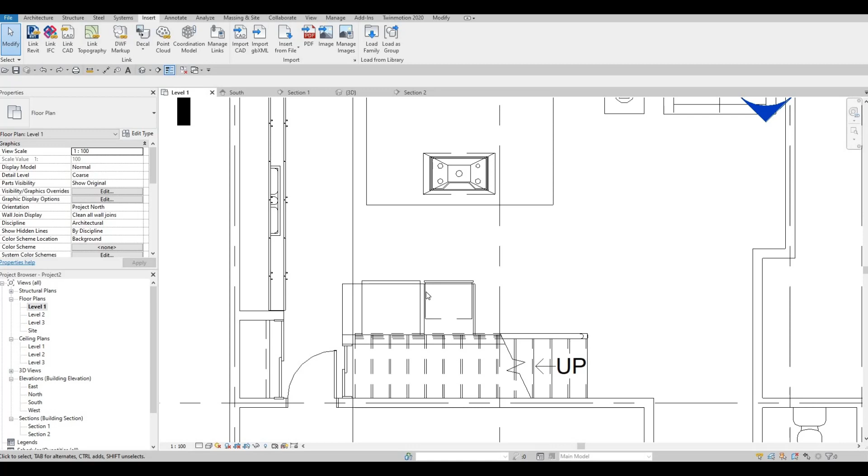So in the previous video, we were able to finish off the kitchen. And as you can see, we have the island and we have the fridge here. And then we added some furniture. And here we're going to continue working on this. And what I want to do is I'm just going to pull this back because I want to add an extrusion later on here. So I'm just going to leave it like that.

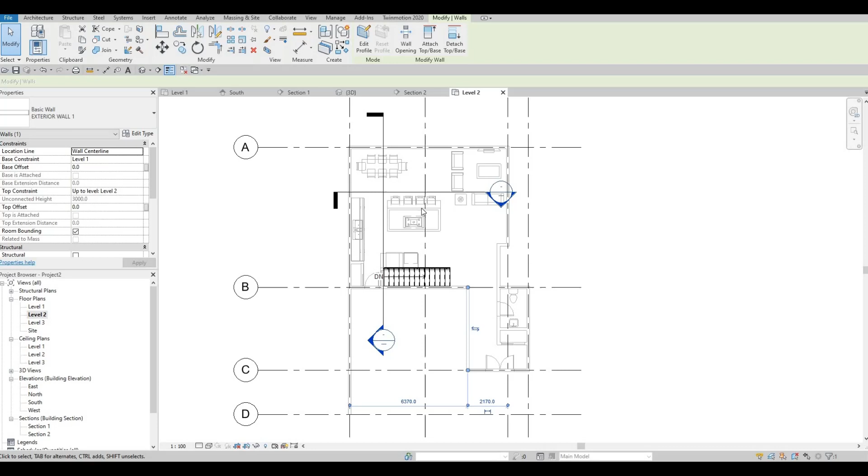But what I want to do now is we should add the second floor. So let's go to second floor. So it will be right here, level 2. And then as you can see, we have an overlay of below. So that's fine because we're gonna create some of the perimeter of the walls with this one.

So let's press escape multiple times and then click on architecture, click on wall, and then we want to make sure that this is exterior wall. And then after that, you want to make sure that it's up to level 3, which it already is, and it's centered, and then it's chained. And then now we're ready to add it.

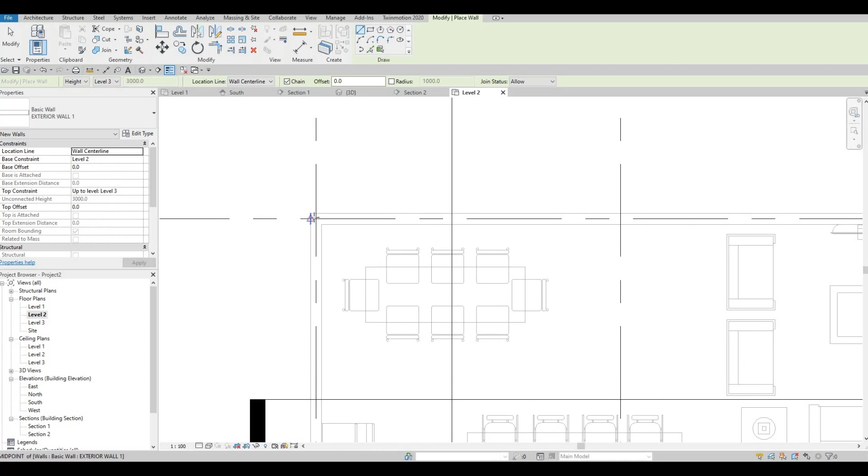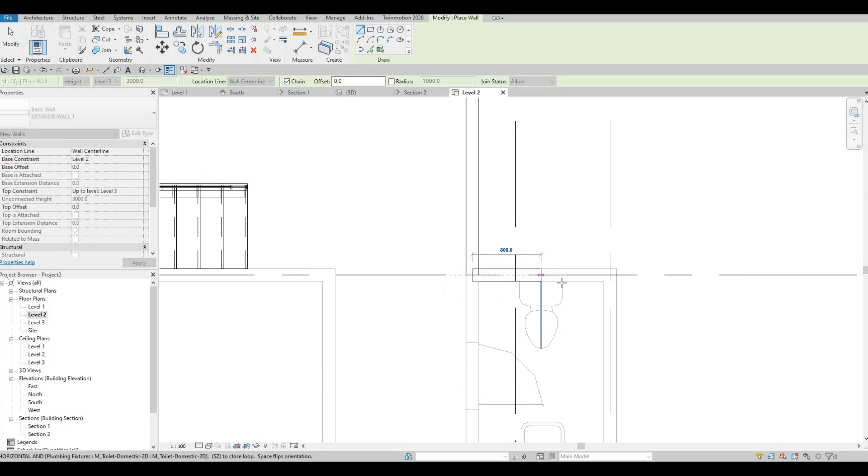So click on A1 up to A3 and then going down and just copying this one at below. So we're copying what we did below. Move it like that.

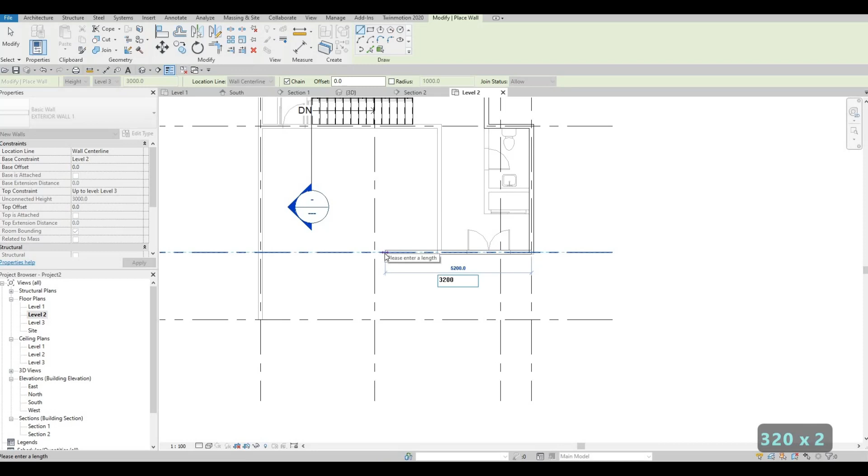And then now here, what I'm gonna do now is to connect this one up to here all the way to the left side, but typing in 3200. And then after that, after the 3200,

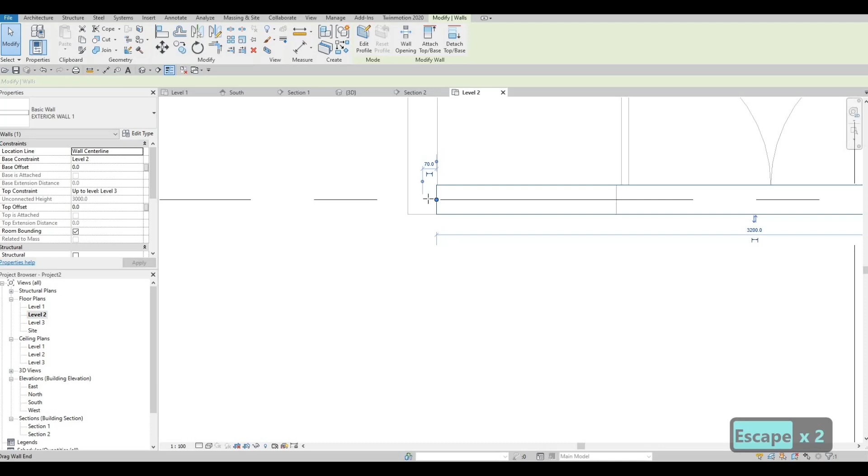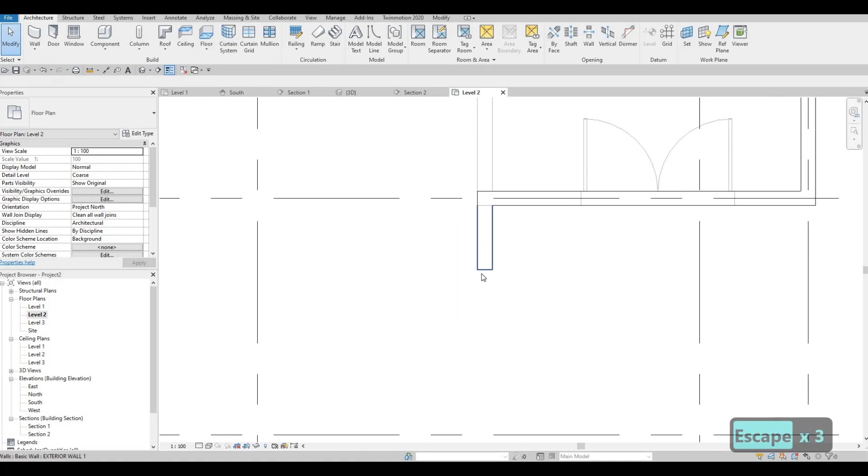what we could do here is click on the wall again. So I press escape so that we could just go on up to here. And then let's just connect this one again like that. And I want to make sure that we have everything aligned. There we go. And then now here, I want it to be around 7 or 800. So I just put it at 800.

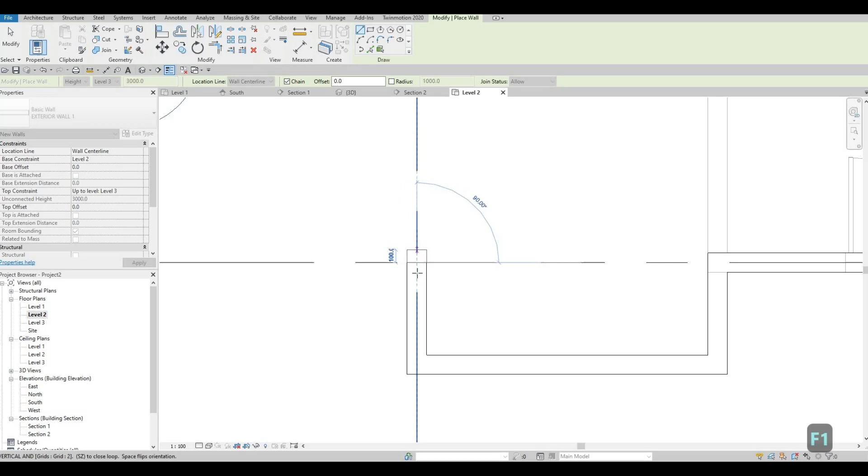And then now we're going to continue working on this and just connect it like that up to this grid line, which is number 2. Go back here. And then now give it a little bit of a gap here. So what I'm gonna do here is we click on C2. Now we're just gonna extend this wall around 500 could be good enough. So you can type in 500. So we're basically clicking here and then just clicking 500.

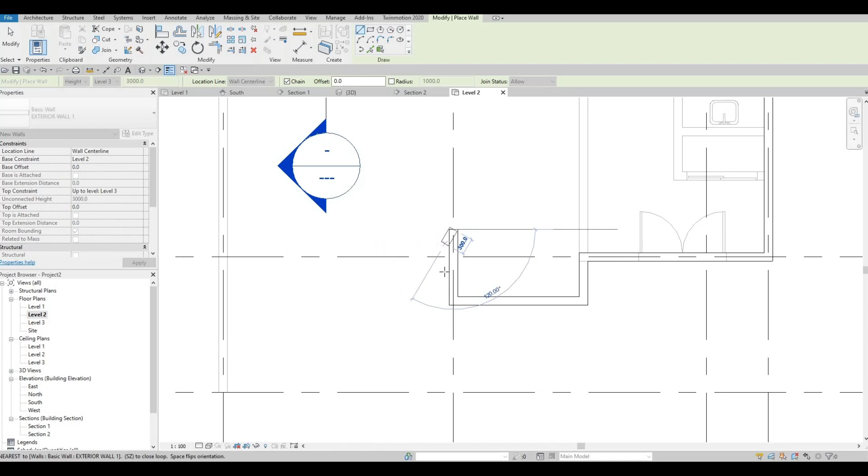And I just want you guys to follow it. That's why I did multiple clicks. But as you can see, this will be just one single wall. So now go up to the number 1 grid. And then you want to finish it off and go into A1 grid. You can then press escape multiple times.

And then now we could go to our properties and then take off range base level under underlay, and then we should put it at none, and then click apply. Now everything will disappear and we won't be able to see what's going on down. So that's fine.

Next thing we're gonna do is let's add in the interior wall. So I click on the wall and then just change this to interior wall. And then once we do, we could just connect this one all the way to here. So that's done. I'm gonna add in a wall like this right here. And then through that, we could set up how far it should be.

So here, I'm going to move this temporary dimension right here. And then from here, I'm just gonna type in, I want it to be 980. So it went back because I set it from here. After that, let's add in the same wall. So you can type in CS now and then click on this wall.

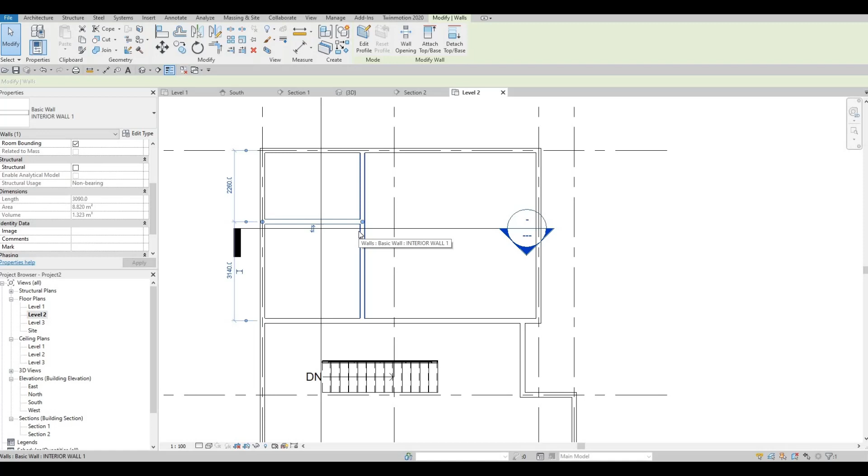And then now click on the wall again and you want it to be set around 3140. So 3140, it will be right here, and we're gonna set it up again. So let's add the same one. So click it, CS, and then let's add a wall right here. And then that wall should be around 1340.

And then let's add in something like that. And this one will be around 1240. So that's fine. And later on, we're gonna pull this out because this one is a shower area. And then now, let's add in more walls. So now we're just adding the walls so that we could manipulate the area.

I'll be adding a wall right here. So I added the wall somewhere right here for now. And then add another wall right here. And then this wall should be around 1300. So that's good enough. Maybe we could put it at 1200. So I put it at 1200 like that.

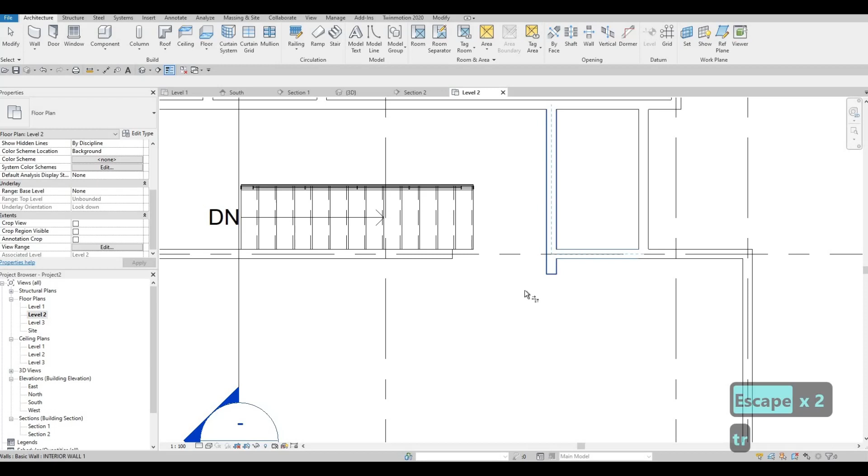And then we're gonna add a wall right here as well. So CS on this, and we're gonna pull this back. Let's use trim and extend so that we could just trim it like that fast enough. And then same wall, we're just gonna add in a cabinet here, like so. That's too big, so around 600 will be good enough.

And then 600 by 600. Okay, we're going to extend this a bit, maybe around, I'm gonna pull this one around 1000. So let's check that earlier, how far will it, so around 1000. So that's good enough.

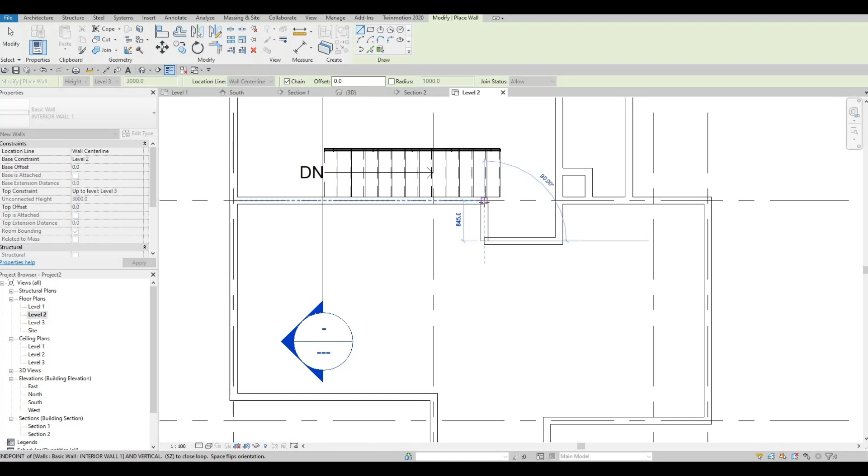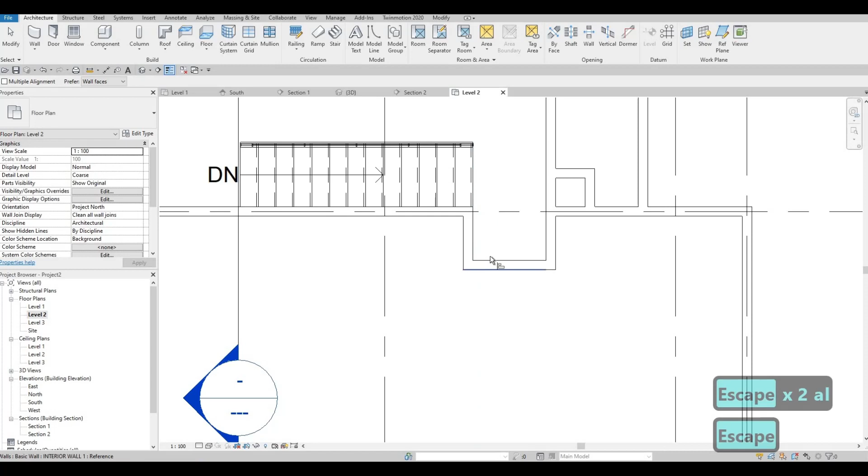And then CS, let's add this and close it off like that. We're gonna pull this out so that we're not bothered with this. So CS, so align it. So AL to align, and we could just pull this back a bit because we have our temporary dimension right here, and we could set it off now at around 1100. So that's good enough for our doors.

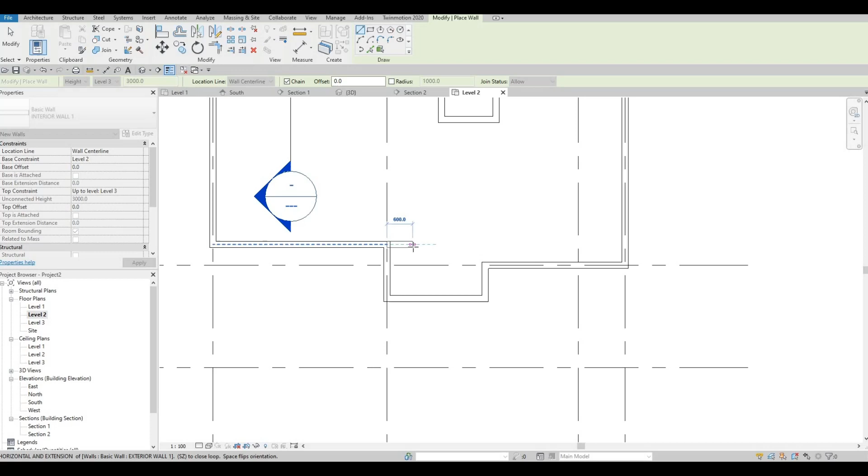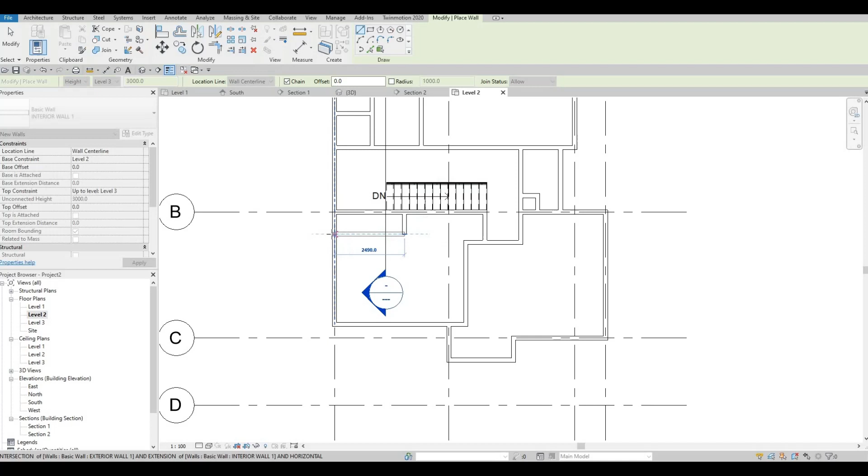And we should click on the wall again. And what we could do is we could extend this one a bit, around 500. Add it like that, and then use trim and extend TR. So we have our door going in, and then we're gonna have a closet right here. So click CS, and then let's add a closet right here, around 800. And then the size here is around 24. Let's put it 2400. So that's good enough. That's big enough for this space.

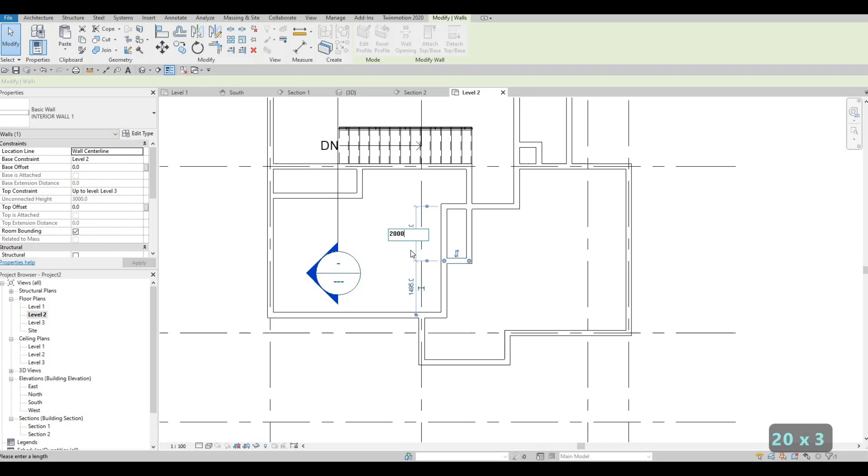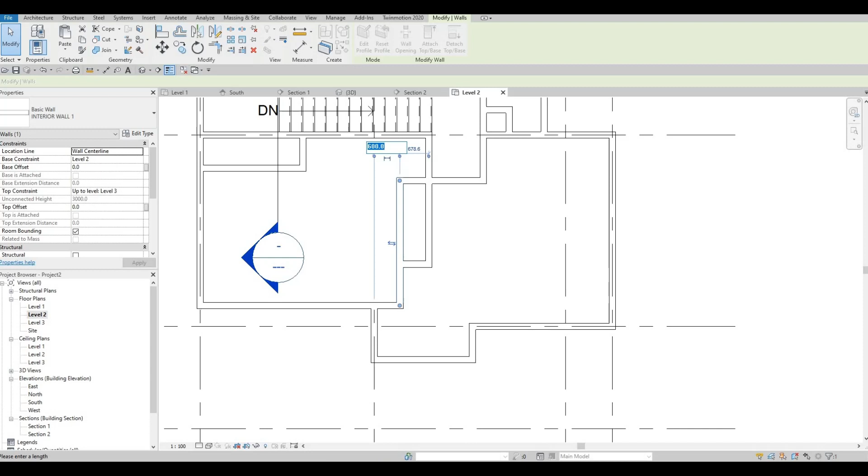And then here as well, we're gonna extend this, and then click on the wall again, or do a CS. We can extend this and manipulate this now. So from here, let's put it 2000. More than enough space. We have a space here as well. And then now we could move this a bit. So instead of 500, let's put in 400. So let's extend that a bit. So that's fine. I'm happy with this.

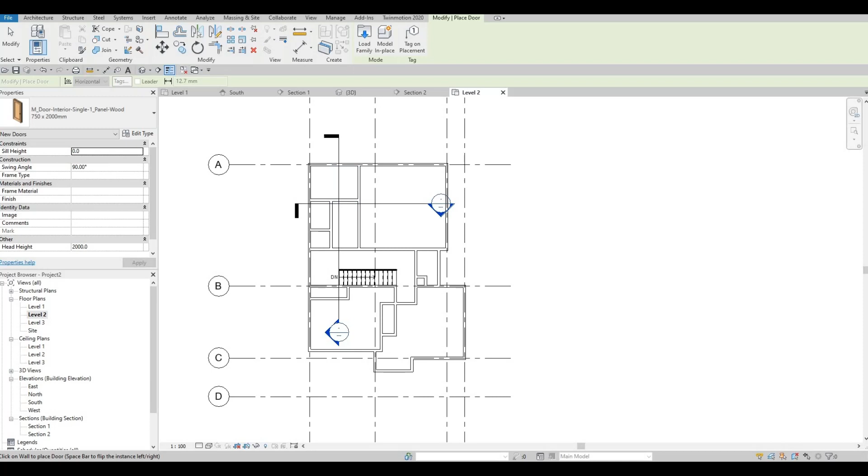Let's add in the door so that everything is clear. Let's use the 750 by 2000, similar below. So here, let's add the wall of the door right here, and it should be going in like that. This will be the washroom for everyone, for these two rooms, and then for this master, we have an entry. And like I said, we're gonna pull this out because this is a shower.

And then now here, we can add a door for the entrance of the master. Here we have a door for this room, and we could add the door right here for this room. So that's good. Everything's getting cleared.

Click on door again, but change to the sliding door. So let's put in 1200 by 2000 again, and then let's add 1200 for here, and then press escape and then click it again. Now we could change this to 1500 or whatever fits. So maybe 1700 will be good enough for the size. Here let's put in 1500. This one 1700. And this one let's put in a door. So CS and add the door like that. This will be the walk-in closet.

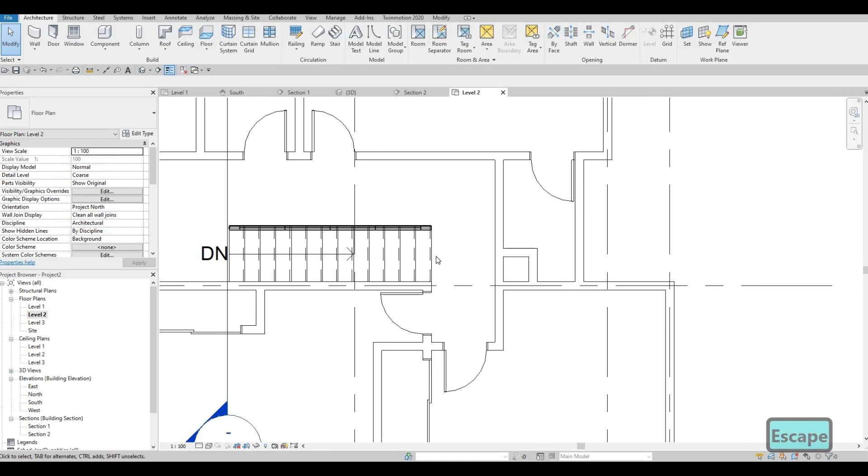Let's see the size here. 1200 is more than enough for the space. Just we're gonna add in some sort of barrier here, because we're gonna go down here. This is where the stairs are, and we need some space there. Okay, let's clear this up. And then this is the laundry. So we could click on this, and then we could just add a door right here for the laundry.

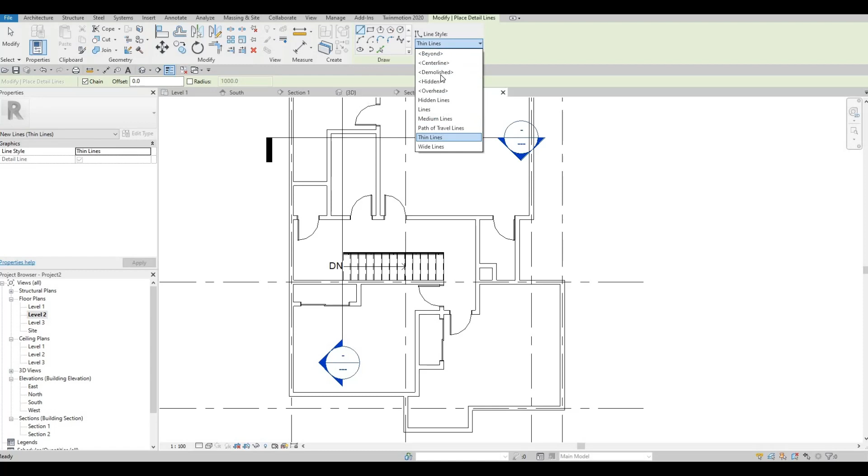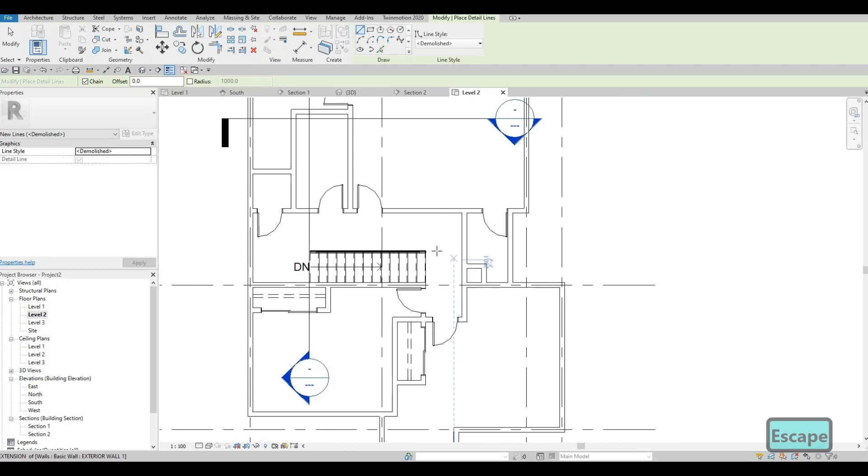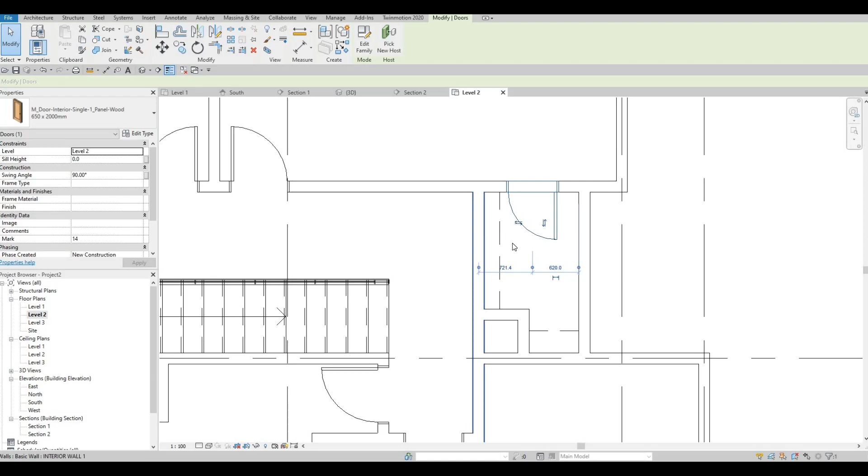And let's add in some details here. So go to annotate, click on detail line, and make sure this is demolish. So we need to add 2 lines like so to represent the rod. Okay, and then here as well. We can make this smaller. So around 650 by 2000 would be efficient, or we could add a sliding door. But I think a small door like this will be good enough.

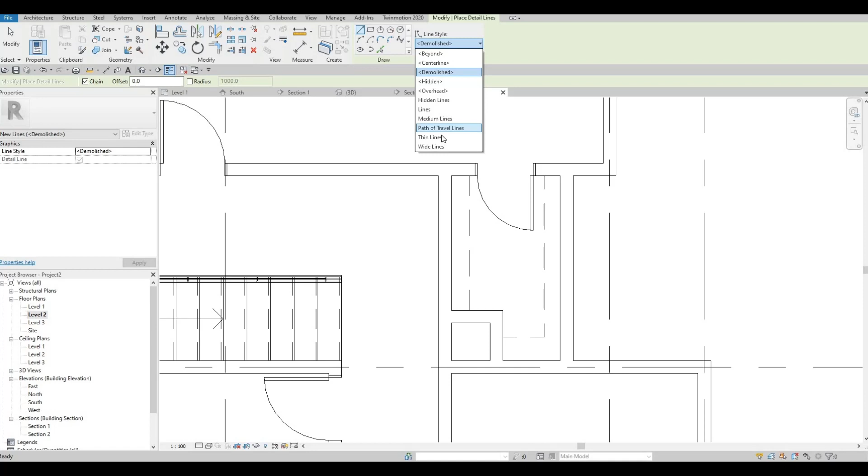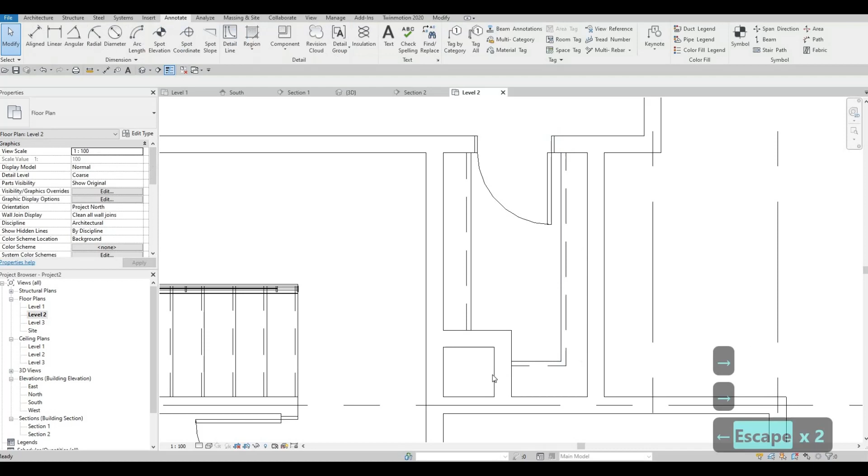Easiest way is you just click on this and then type in CS. Let's put it on the middle like so, and then we could just trim this and then move it in place. And then after that, let's click on detail line again and then put in thin lines. Like that, and then let's add it like here, and then use trim TR to connect them all together. And then we could just move this one a bit so that it will be similar flow there.

We could add in a desk here later on, and then the beds as well. So let's stop here for now and continue on the next video.